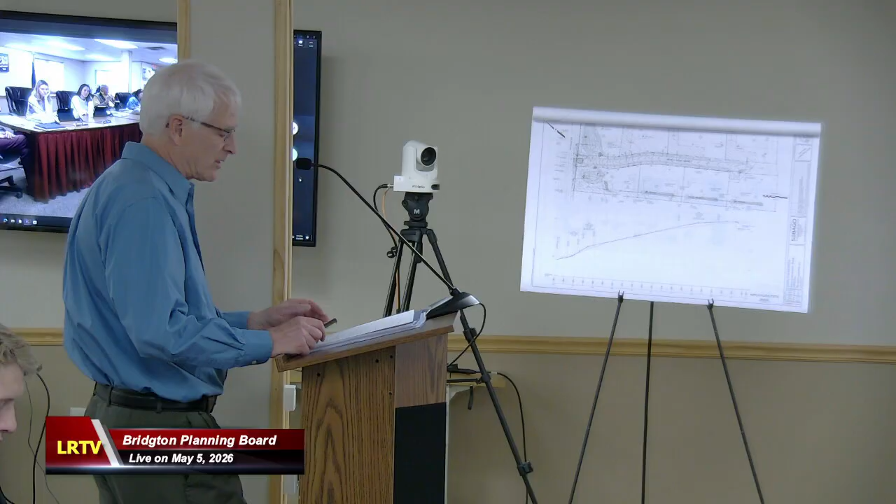It was noted at the last meeting that the well for Lot 5 is located relatively close to the stormwater basin. We confirmed, looking at the Maine State well driller, well installer, and well pump rules, that there are no specified setbacks from stormwater basins or similar stormwater features. That stormwater basin will have an impervious liner, so any runoff from the pavement that gets treated through that filter will be discharged out through the soil filter and won't have the opportunity to seep into the groundwater. So we don't anticipate any impacts there. The available or recommended areas for wells are also shown in the hydrogeologic study, which I'll touch on in more detail shortly.

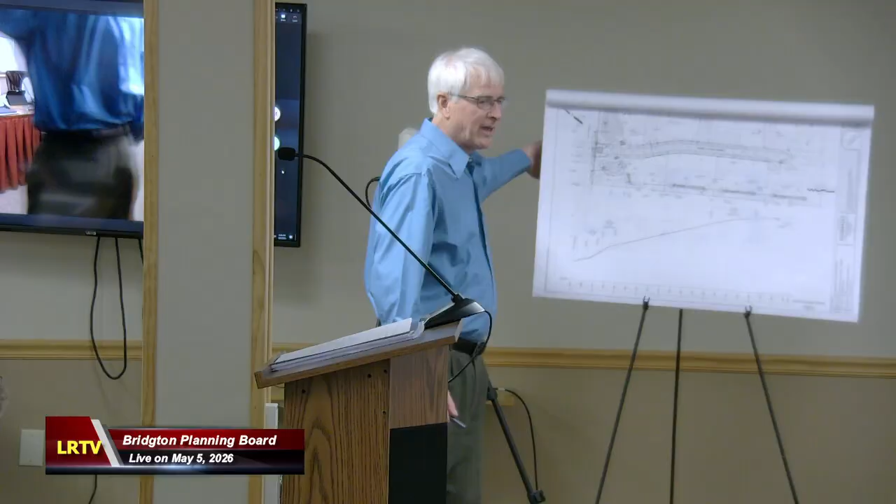We also requested a waiver on the sight distance standard, and we provided a sketch in the revised application materials. As you can see, there's a pretty sharp corner in the road here. The town standard is to provide 10 feet of sight distance for every mile per hour of speed limit. This is a 40 mile per hour posted speed limit, so that would result in 400 feet of required sight distance. The Maine DOT highway standards for a non-mobility highway would only require 360 feet of sight distance for a posted speed limit of 40 miles per hour.

Normally that 40 foot difference wouldn't matter much, but as we saw on the site walk, when you look up at this corner, 400 feet takes you right up to about this location. To achieve that, we'd have to do clearing through here, basically opening up that nice big stone wall. If we can reduce that to 360 feet, it would pull the line back nearer to the property corner, allowing us to just clear within the road right-of-way, without having to go over or up to the stone wall.

Basically we'd pull that line back and keep this buffer intact. We feel that for this type of road, given that a large majority of traffic will come out and turn right to get back to Roosevelt Trail - and looking left you've got plenty of sight distance - and given that Maine DOT standards for a highway potentially busier than Ohio Ridge Road would require 360 feet, we feel that's an acceptable level of safety, and it reduces the amount of clearing needed along that road right-of-way.

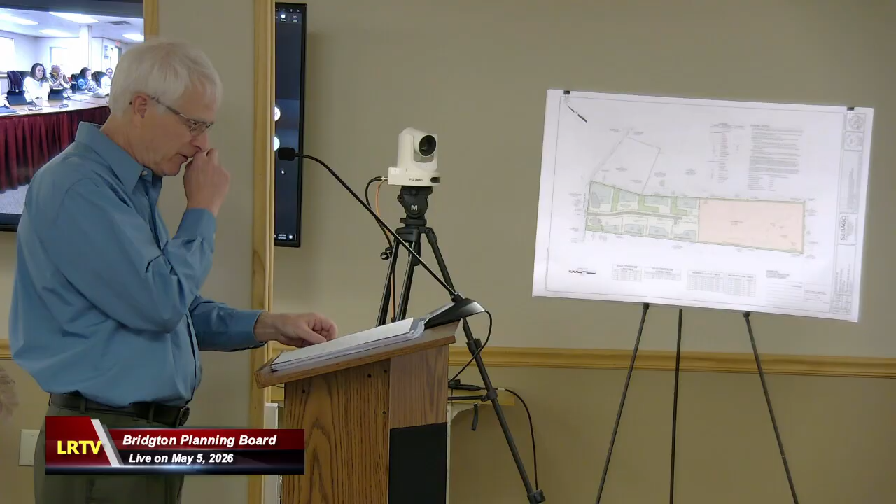There was also a comment or question about the financial capacity letter, and I'm sure Ryan can answer any specific questions, but I'll reiterate that the lender is a private lender, not a bank. However, the financial backer for this project has worked with this applicant on other similar projects. They have an ongoing relationship and they do have the funds to back this project. If you need additional information, Ryan can speak to that or provide information from his bank to support it. Based on what we've provided, given the past relationship with this lender, we feel we've met that standard - but we'll leave that up to you to decide.

We also wanted to address a comment that there's an abutting parcel that's either in the process of, or has registered, their land as farmland, and we understand that requires drinking water supplies to remain 50 feet from that boundary line. Let me flip the page.

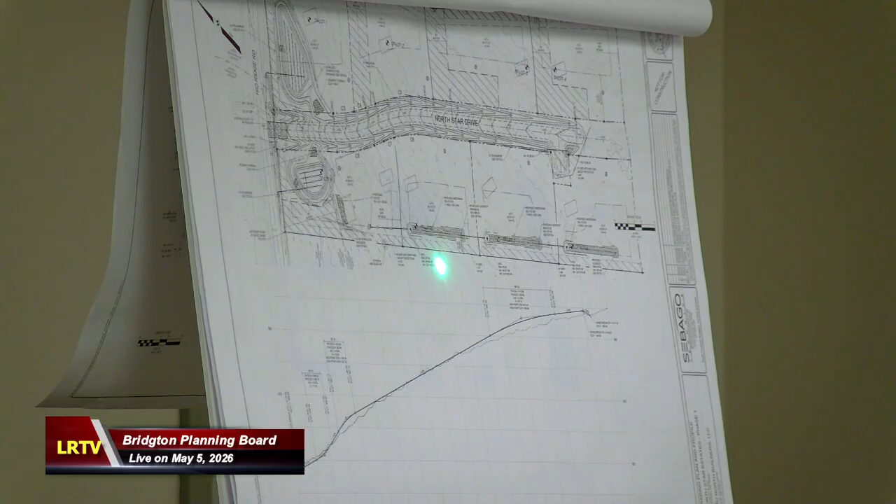The roadway itself will also pick up a lot of that runoff and carry it down to these basins before discharging into that ditch down here. So a little less of that will come off the property and down through the property than it does now. Even with the additional development, it shouldn't make anything worse with regards to runoff, phosphorus, and nitrates. It may even improve things a little bit.

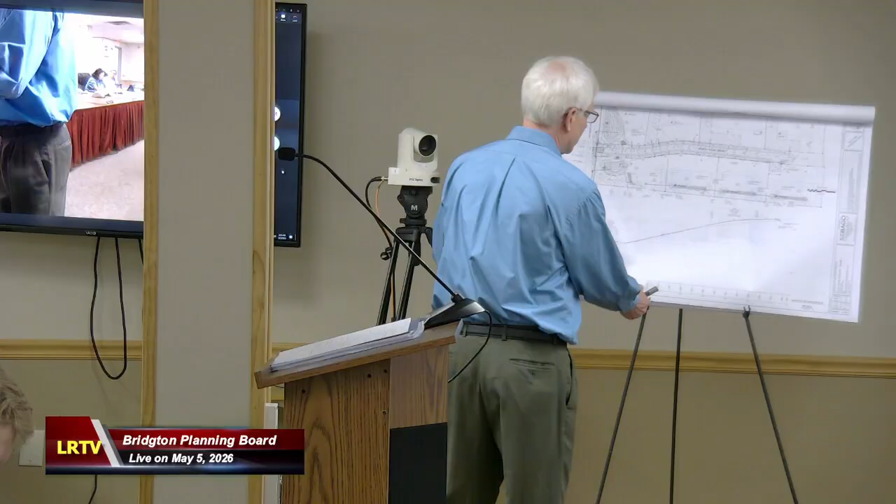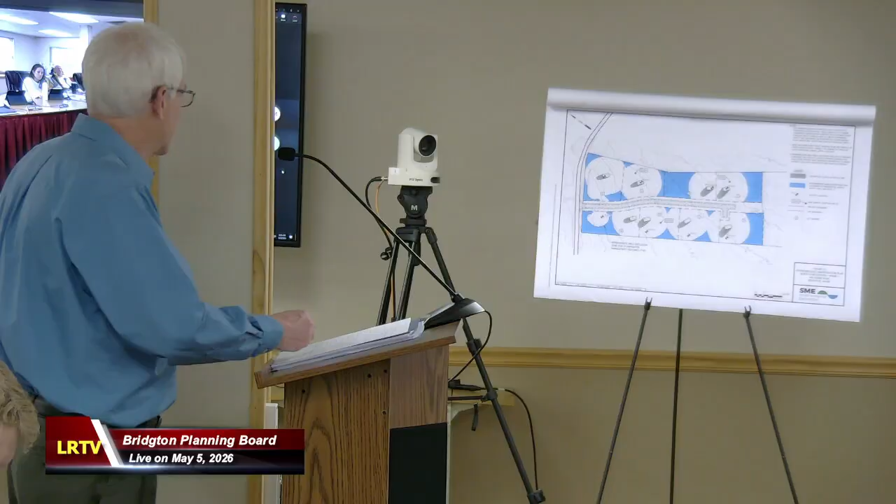I'll also jump to another sheet here that shows the results of the hydrogeologic assessment. As you can see, the nitrate plumes are plotted off here. They don't go anywhere near the boundaries, so they won't impact abutting properties. These blue shaded areas identify the areas that meet the setbacks from the wastewater disposal systems to the wells, and all of our proposed wells are within those blue areas.

The initial test pits done for these three lots were done down near the boundary. Those wastewater disposal systems are proposed up in this area. Also, this test pit done for this lot is not in the proposed wastewater disposal area. So the site evaluator who did the initial test pits is working on that this week. He's supposed to have those additional test pits done. We're also looking at doing another test pit for this one, potentially moving it up a bit to create a little bigger building envelope for this lot, where it's somewhat encumbered by the pond.

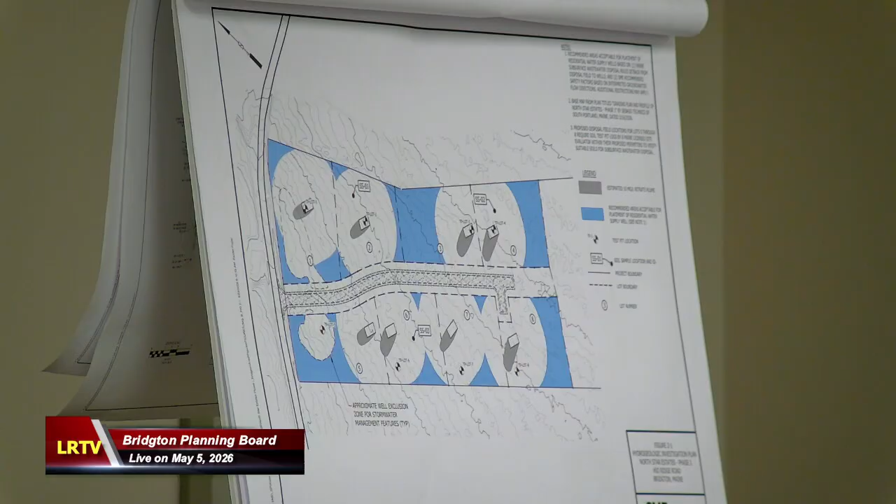These test pits are all going up gradient from the existing test pits, which already passed, and the soils and groundwater conditions tend to get better as you go up gradient on the site. We do anticipate those test pits to pass as well, but we'll have those results for you, and we'll include that in the final submission for next month.

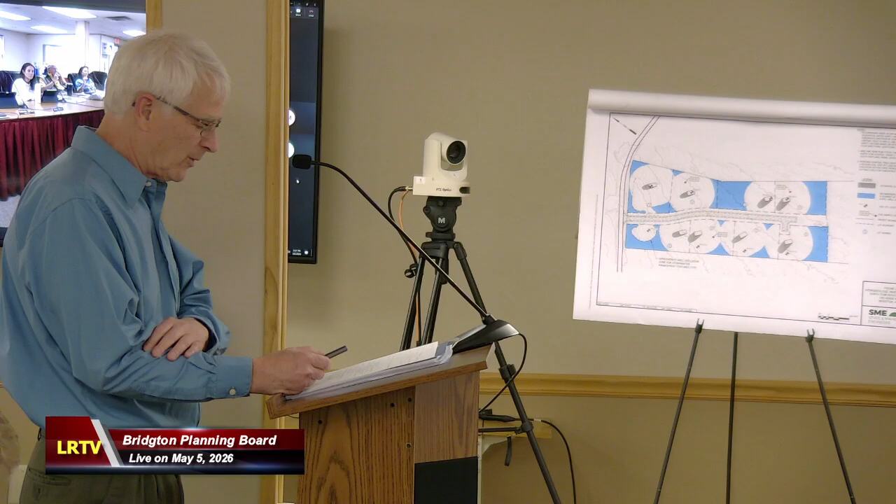Just a couple of other questions came up. I believe the proposed project is a conventional subdivision; it is not proposed as a planned unit development. We have added contours to the subdivision plan per the ordinance, and we've confirmed with Chief Garland that the hydrant specified—I believe the wrong road may have been included in the sketch plan—but that particular hydrant is within 1.5 miles of the site.

And then I guess with that, I'll turn things back over, or answer any questions you may have.

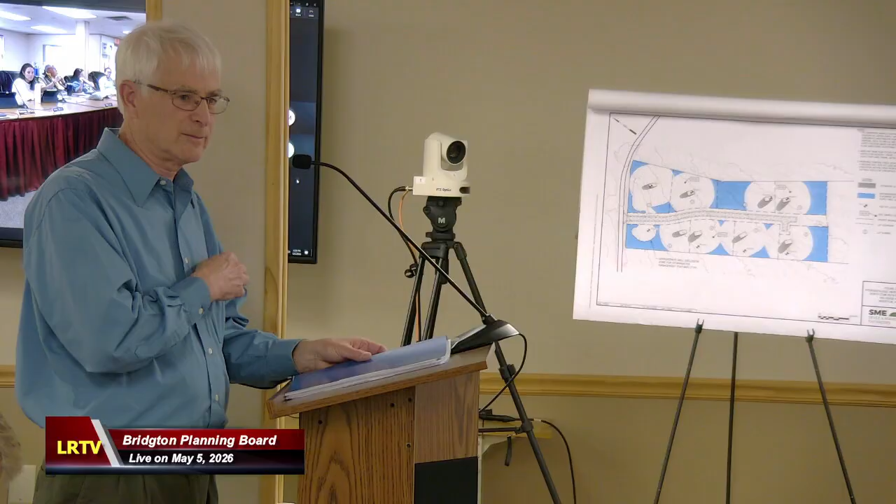Okay, I think we'll go to the public. Is there anybody from the public that would like to speak to this application? Go ahead, your name and address please.

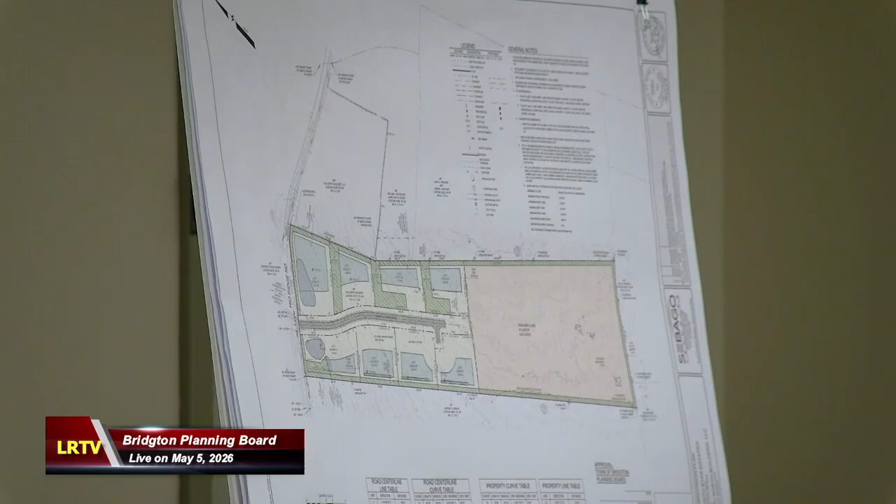I'm Braun Whitney, 186 Howard Ridge Road. So I would be the western lot to this. The way you're looking at it, I would be the almost 2,000 feet along the bottom half of this picture—that's what my lot is. I'm also the farmland; it is deeded and recorded at the state.

That was more of a protection for us in case this goes through and they put in a homeowners association, and sixteen of them decide they don't like living in the rural area with chickens and farm sounds and try to change that. The farmland designation protects us from them coming at us for that.

One of my big concerns with this project is I've been there for 10 years. It's a very rural road, rural setting—that's why we moved there. The size of this project alone, it's not rural. It's basically wiping out this 19-acre lot.

So going to some of the stuff in the ordinances and land use codes—this is in the residential area, so bear with me, I'm not used to doing this. The land use code states that the purpose of the rural neighborhood district is to protect the rural character and natural beauty of these areas while supporting low density residential development at no more than 1 unit per 2 acres, or cluster housing development allowing smaller lots or condominium clusters to occupy a percentage of land in order to preserve open space and environmental features.

They're saying this is obviously not a cluster development, which means the back half of this property is also going to get used. These lots at that point would be well under 2 acres apiece, which doesn't follow from what I'm seeing.

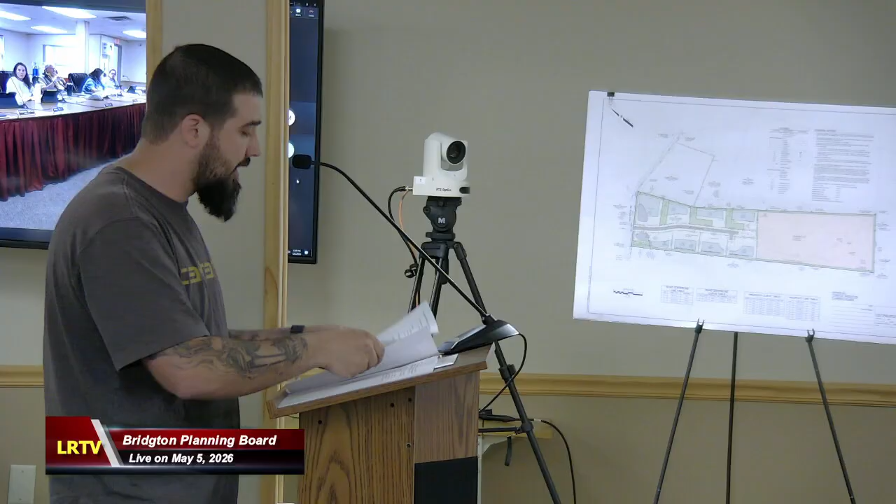The other thing that would concern me with it is the... Excuse me. DUA, just clarify for me—where is it? Oh, I'm sorry, did I word that wrong? Yeah, DUA, the dwelling units per acre.

Is this in the subdivision regs or somewhere else? This is all in the land use code for a subdivision. It's saying in the register, the rural neighborhood district, as stated, is 1 unit per 2 acres. It's saying for a rural neighborhood, it shouldn't be above 0.5 dwellings per acre. Just recognize that this falls under lot size and number of dwellings per lot.

Sorry to interrupt, just to clarify—you know this better than I do. This, because it's a subdivision, falls under the subdivision regs. And in the subdivision regs, the lot size requirements to be followed are the ones in the subdivision regs, not the ones in the district.

That's the same for frontage. However, the other dimensional standards, setbacks, those sorts of things do count. So just so you're aware. So they're not held to the 1 lot per 2 acres? No, that's part of the... isn't that right in the regs?

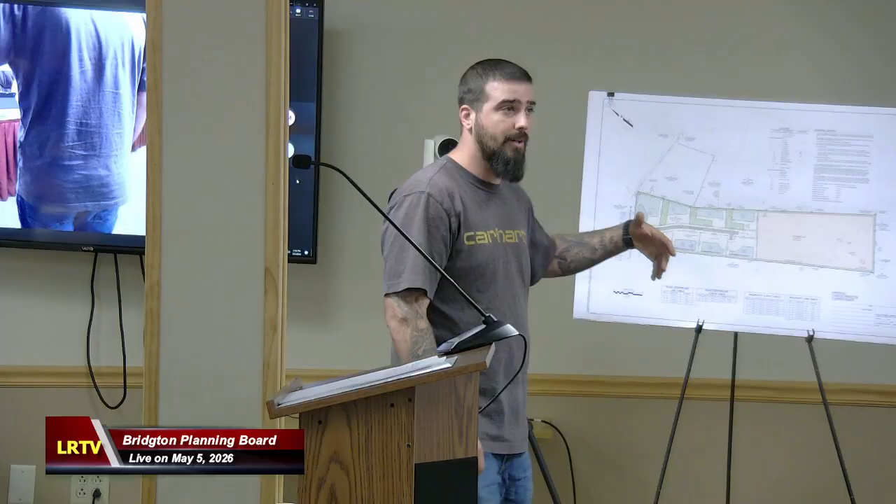Okay, so can you point on the map where that is? The spots I have pictures of would be like here—there's nothing between me and the rock wall there. There's spots, because this lot and my lot, about 15 years ago, were both logged since they were once one lot. So there's a lot of skidder trails and ruts, as you probably saw at the site walk, that go through both pieces of property.

And none of those are grown in—it's all just thin little alders, so there's no actual coverage there. A lot of those are 20, 30 feet wide, so I don't know how that's an effective no-cut.

That would be a concern for me. So, I don't feel like I should have to keep a 50-foot buffer on my half just to compensate, you know what I mean?

Okay, let me ask a question of the applicant, Mr. Garish. When we did the site walk, we were close to one boundary—was it the boundary on the top there? Yeah, you walked the upper part of it. We walked down the road.

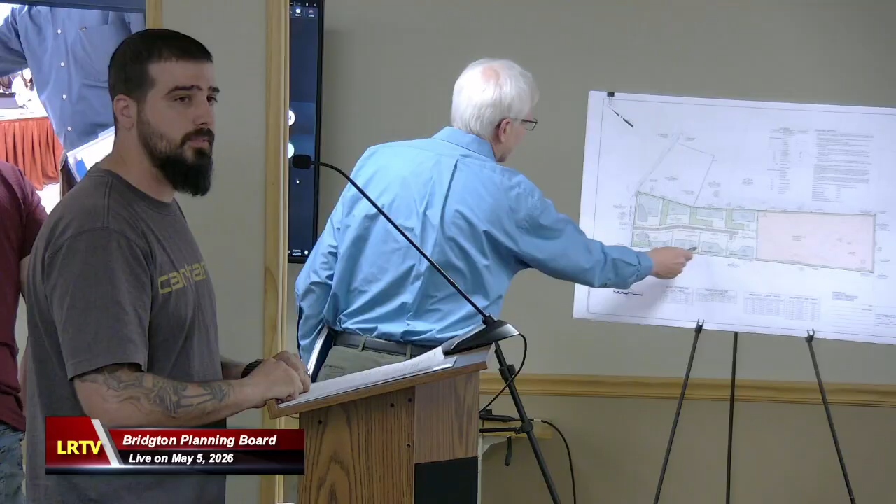When we came up, we did go up kind of in this area, then came back down, so we didn't get to see this border. It does look pretty consistent with the area. So basically where you guys came in on the site walk, that opening with the skidder trails—that's what it looks like periodically through that entire side on mine, because they logged from there to me, not from there up through, if that makes sense.

So, no landscaping plan or any real definite effective screening there would be a concern for me. I would submit those photos, and if the board feels we need another site walk to walk the border of Mr. Whitney's property, we can always do that.

Please submit those, and Mr. Garish, if you'd like to submit photos, you may also do that, and the board can look at those and make a determination. There are spots where it's dense and you can't see, but there are a lot of spots along that border that, like I said, are a concern. Thank you for that.

What was the other part of it? The comprehensive plan—I guess that's usually taken into consideration for these things too, as long as the project aligns with the comprehensive plan.

So the last one that was done, the 2025 comprehensive plan, is that what I'm referring to—is that the only one I've seen online? Well, I'm glad you've read it, but that's the one you'll vote on come June. The current one is 2014.

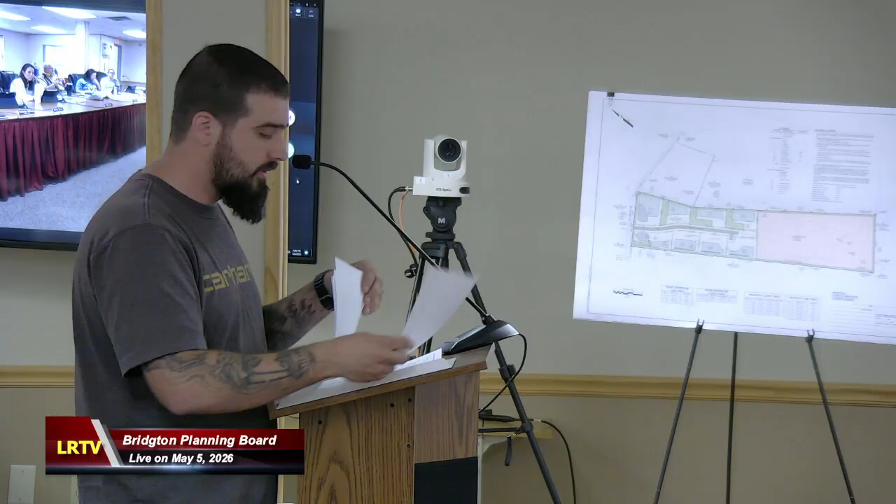So again, they're talking about the soil test being done. They said, I've owned the lot next to it for 10 years, they've had it for 10 months. That site is regularly pretty wet. The water that comes from that site comes to mine, and the water that comes from the lot to the right of me comes to me. The skidder ruts you found on there are there because the lot is wet. So I feel like if they're going to have to do the soil tests, why only do the D? Do the A that's required, because I'm worried they're going to start getting into this, realize it's a lot more wet than what they think, and it's going to end up in a giant sloppy mess.

Can I ask a clarifying question? Sure. Yeah, when you're talking about farmland enrollment, are you enrolled in open space farmland classification for property tax purposes?

No. Or did you put an agricultural easement on your property? How is it protected? The land itself is deeded as just farmland. I don't have it enrolled in any kind of tax benefits or anything like that, so it's more of a protection for me from noise complaints and that kind of stuff.

So what's the state program then that it's in, that it's deeded? Is it a deed of conservation easement, or? Here it is. I can look at it later, I was just curious what the program was.

Yeah, hold on, I can try and answer your question. Farmland registration, Department of Agriculture, Conservation and Forestry, okay. And then it has some requirements for the abutters, which Mr. Gare just spoke to. Yeah, none of the requirements are really going to affect anything that he's doing.

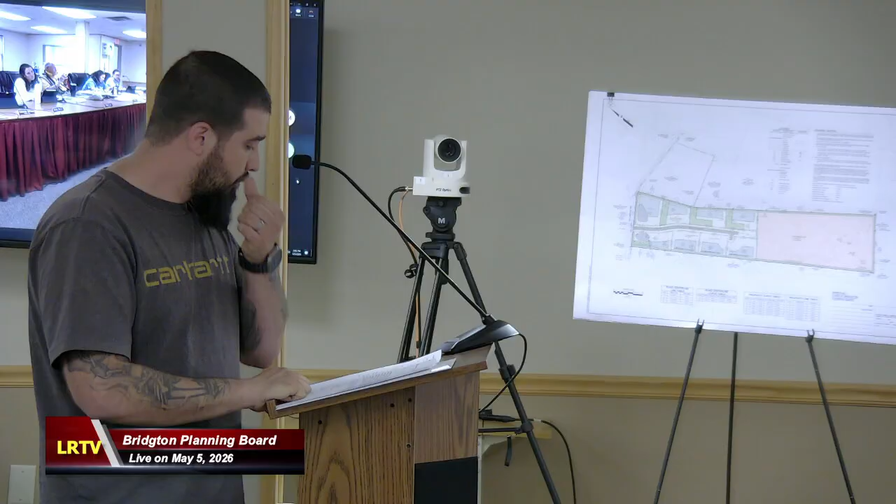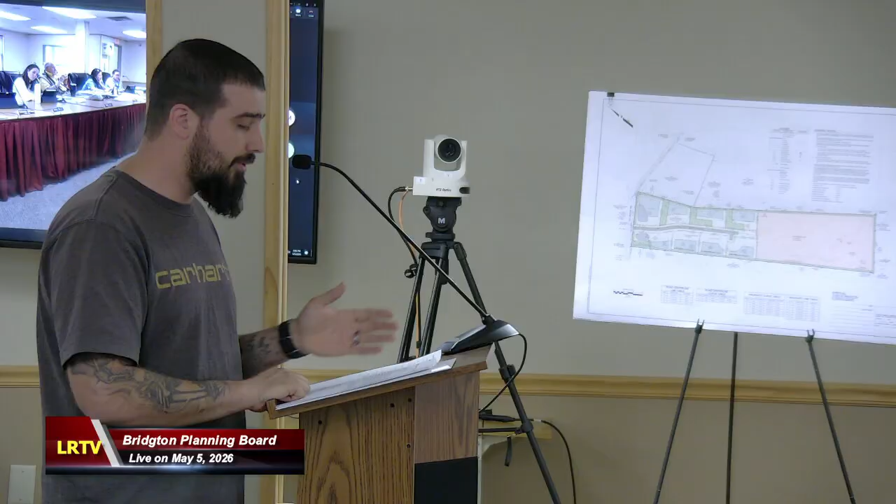Another concern is there's a lot of people that walk that road. I don't know if it's been brought up, but the Winona Summer Camp is also on that strip just down the road, which increases traffic in the summer. They also just opened up a wedding event venue a little further down the road, which they'll be running from May to October, also increasing traffic. There are a lot of people that walk on that road, dogs and just people in general, and that corner you come around to is kind of a blind corner. Usually when I come around it, you're having to slow down and dip into the oncoming lane because somebody is walking. So visibility there is pretty important.

So some things to keep in mind. Is that it? Yes. Okay, thank you very, very much.

Bill, I don't know how you want to do this, if you want to address Mr. Whitney's questions now and do that back and forth, or if you'd like to hear if there are other abutters with questions and answer them all at once. I'd be happy to answer them all at once if there's other comments. Okay, great. Is there anybody else who would like to make a comment? Name and address, please.

Hello, I'm Beth McAvoy, and I live on 45 Frost Farm Road. I went on the site walk. I was really surprised to see how wet it was.

In my opinion, that whole area of Ohio Ridge and Frost Farm Road where I live, which also has a tributary called Carissa Road, is all kind of a bowl. There are ridges in there, but it's a bowl, and that is one of the lowest parts of that whole bowl. Ohio Ridge is posted every year, repaired every summer. There are frost heaves every year right near this site. So I know that the town is going to have to do something about

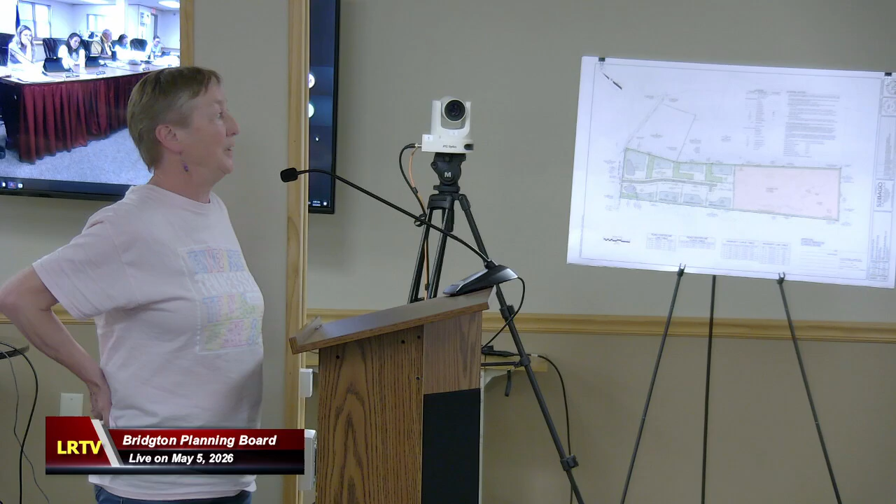In that bowl is a deer yard. There's 2 small ponds. I just feel as though we're chewing up the forest. We're chewing up the woods so that people can live on 1-acre lots with garages, sheds, driveways, wells, leaching fields. Where do we stop? I just don't think this is the right location for this. Thank you.

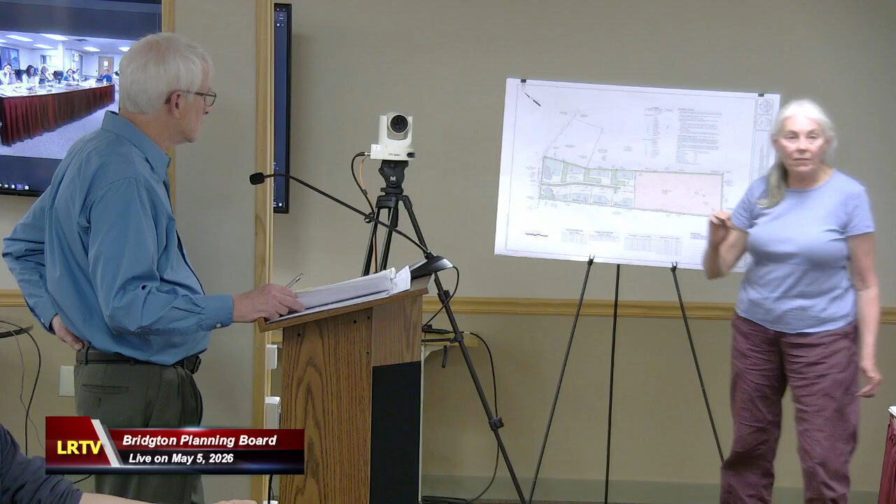Because this is the public road, if you put a 75-foot setback, that would move the setback line to about there. But these lines, which are set back 25 feet here, would move closer to the private road. Is that how you're interpreting it?

Am I getting that? What I'm saying is, these two lots, all along here, would show a 25-foot setback, I believe. This has to be a 75-foot setback. So it's got to be 3 times what this is, which means it comes into the stormwater feature.

The other question we have to answer, is that a structure or not? If it's not a structure, it doesn't matter. If it is a structure, it does matter. It has to be in a different place.

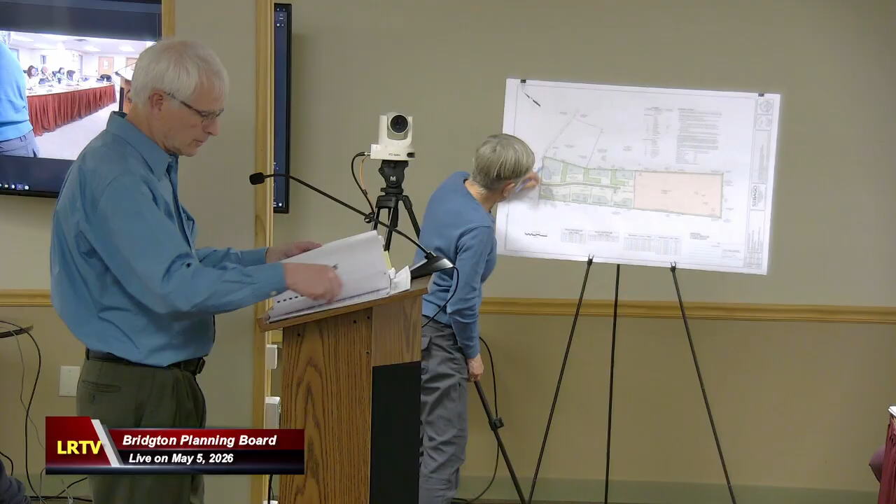So you take 75 feet here, it's going to come out to, looks like right about on the edge, right there. And you do it right here, it's also going to cut into there, okay? However, on this road, which is a private road, the setback here, I'm saying, is 25 feet because it's private. And

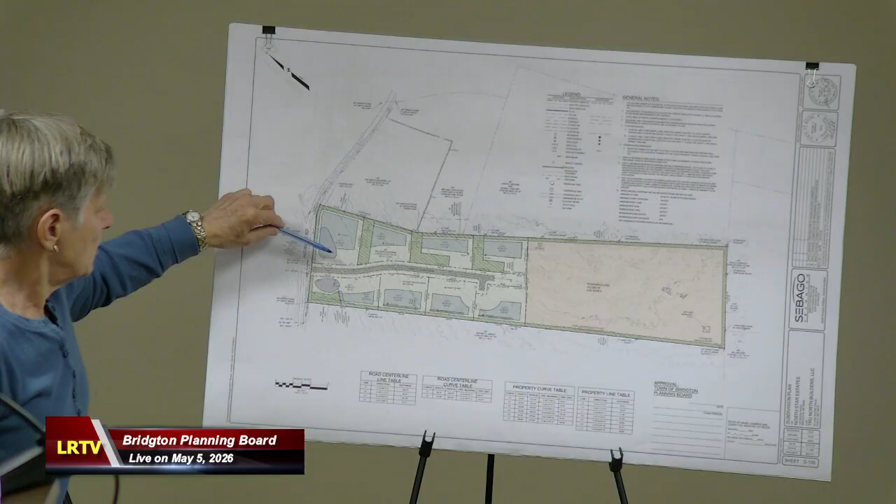because this is a common lot line according to the definition, this is a public lot line according to the definition. It has to meet the setbacks for both the common lot line and this one, but this setback is different. And in the space and bulk standards, it doesn't say to select the most restrictive. It just says you gotta meet it for each road.

So, that's my interpretation, but, yep. And just getting back to the earlier question too, I guess I'd request a little clarification. The section in the subdivision ordinance describes the minimum lot size.

Lot size shall be calculated to include only net buildable land. The minimum lot size for any residential or commercial subdivision lot is 40,000 square feet per dwelling unit. And then the definition of net buildable land is total area of the land after subtracting the land not suitable for development.

And the definition of land not suitable for development is the following areas not suitable for development: significant wetlands, streams, brooks, ponds, vernal pools, stormwater drainage features, public and private rights-of-ways, land zoned or designated as resource protection, slopes in excess of 25%, and significant wildlife habitat as delineated by the Maine Department of Inland Fisheries and Wildlife.

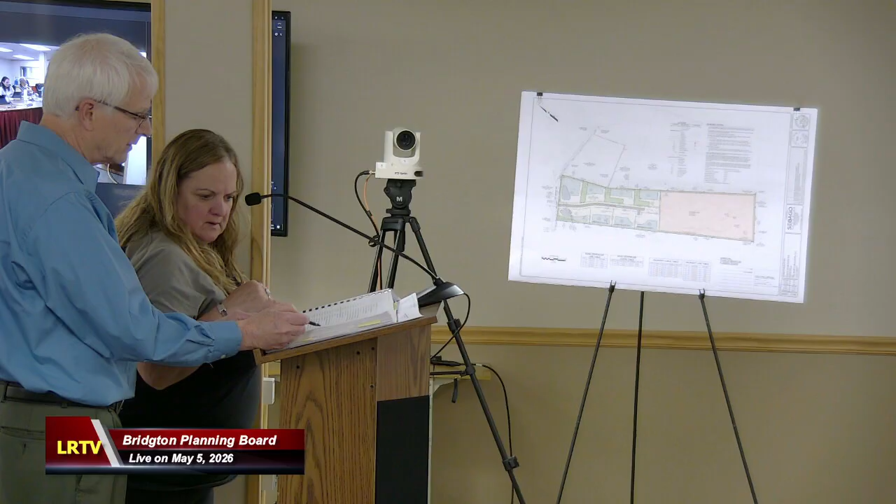Buffers, she found it. No buildings or structures may be erected in the 15-foot buffer strip. If the district setback for structures is less than the required buffer strip, the buffer strip requirement supersedes, which is not the case. Buffer strip must not be used to store trash, personal property, or vehicles, and must not be used to install septic systems or wells. So the 15-foot buffer strip, according to the buffer rules, as long as there's not a setback, as long as there's not a septic there, it's okay. I think it's fine.

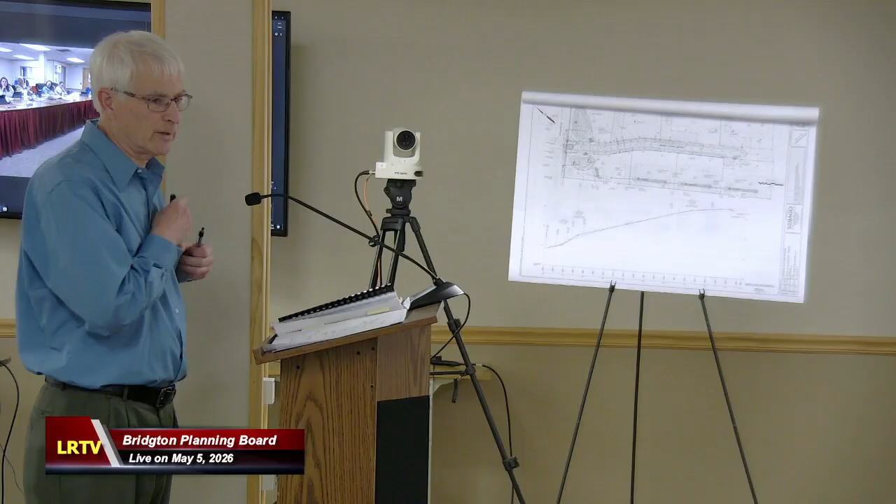According to the definition of structure, it sounds like the board is saying that the under-drained soil filter is not a structure, and the under-drained soil filters do stay outside the 15-foot area. Yeah, you kind of got two things that have to be addressed, the buffer and the setback. Sounds like you do need to adjust those setbacks, and I don't know if that'll drive any other changes.

Go ahead, Kathy, and speak loudly into this thing. I'll do my best. In section 6-4, application submission requirements for the preliminary, under B, part 2, it does ask for the buildable area of each lot. I know you've got it marked out, but it'd be helpful to have the actual square footage of those, particularly as they're going to change.

I also would like to bring up, we've had a back and forth about well location for lots 1 and 5, and I know that you went to the well drillers, but I don't think you went to volume 3 of the Stormwater Design Manual on page 6, Best Management Practices Selection Matrix, Design Restrictions and Setbacks for Filtration Methodologies, 100-foot setback to drinking water wells.

Please review. Is that public drinking water or just any well water? It just said drinking water wells. Did it say public water? It didn't say public water, it just said drinking water. Did it have a state statute reference? No, it didn't.

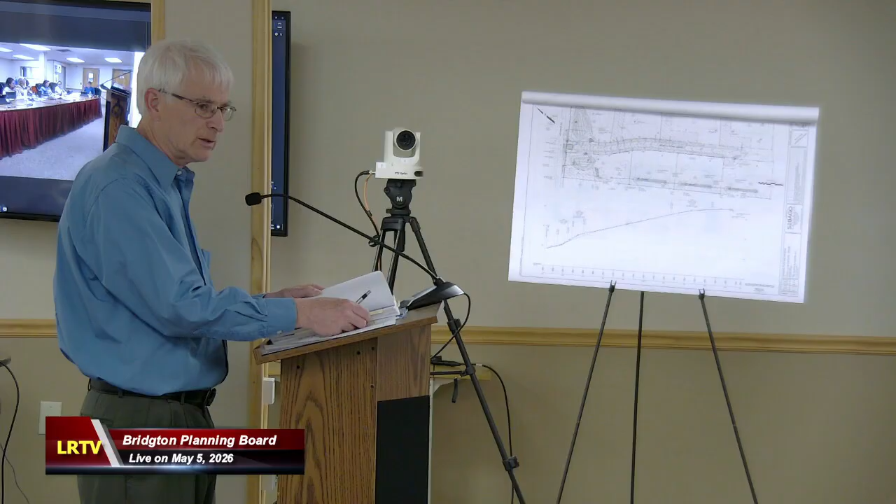Okay, where's that, Kathy? Is that part of the town's requirements, or is it state BMPs, I assume? Volume 3 of the Stormwater Design Manual? Yeah, I'm sure you used it for other aspects of this, phosphorus. Yeah, yes.

I had another question about some of the soils, because the hydrogeologic report reports that he observed Hermon soils, and yet the soils tests done prior, I'm not sure if it's done during the fall or the winter, reported Skerry and Colonel soils. And Hermon soils are different from both Skerry and Colonel soils, so if you could clarify that for us, I would be ever so grateful.

Okay, yeah, Hermon soils are different. Very stony, sandy loam. Hermon, very stony, consists of deep, well-drained to somewhat excessively drained soils that are moderately coarse and coarse textured to coarse textured.

The names are a little bit different, but that's pretty much what we were seeing out there - well-drained. But if you could clarify soils, why one set of evaluators were seeing some soils, and the other evaluator doing the hydrogeologic study was seeing different soils on the same sites, and what the implications of that potentially are.

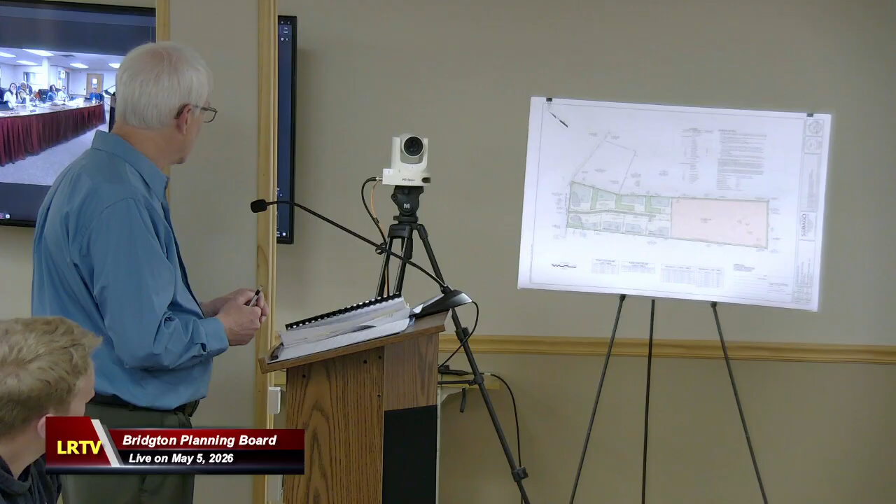There's some old stone walls shown on the map. Are any of those going to be removed? It looks like the internal drive there goes between the walls, but... yeah, your assessment is correct. There is a stone wall here, and it kind of breaks up the drainage, so we proposed the level spreader to just basically match into that wall. So it'll pull this water out into this way and into the buffer. So our intent is to leave that stone wall intact as well.

Okay. And does the board want more in financial capacity or not? No, I think we're good.

Can't remember if you said this or not, but it sounded like in the hydrogeology report they recommended doing additional test pits for lots 5 through 8. Yeah, that's correct, that's just because we moved the disposal areas. The test pits were initially done very early on in the stage, and we didn't really know how we were going to lay out the stormwater.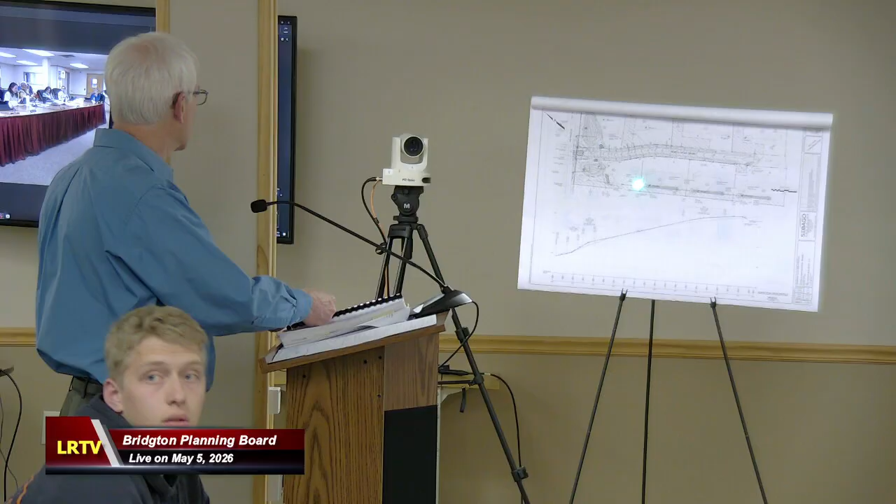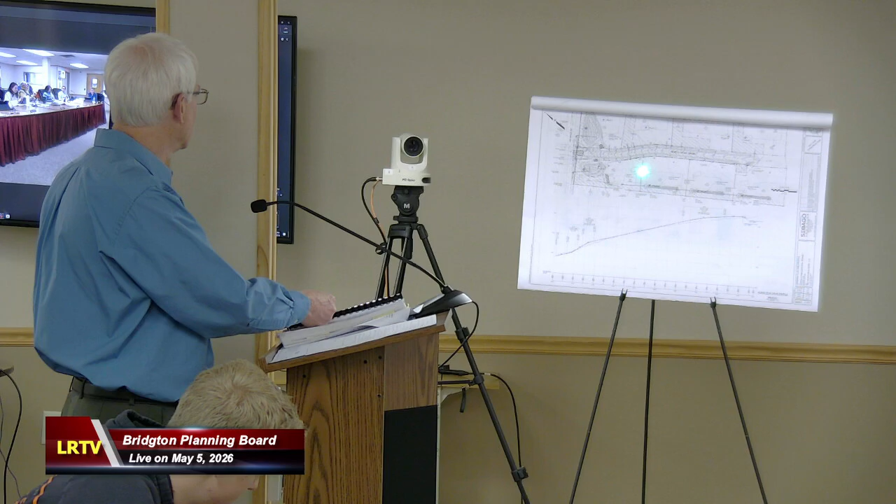So the test pit for lot 5 is up here near the pond, which we wouldn't want for the septic system there. The test pits for these three lots were down near the boundary line, and we want them upgradient further. So we were going to do new test pits just to confirm those areas are suitable. That would be submitted with the next submission - those will be done this week.

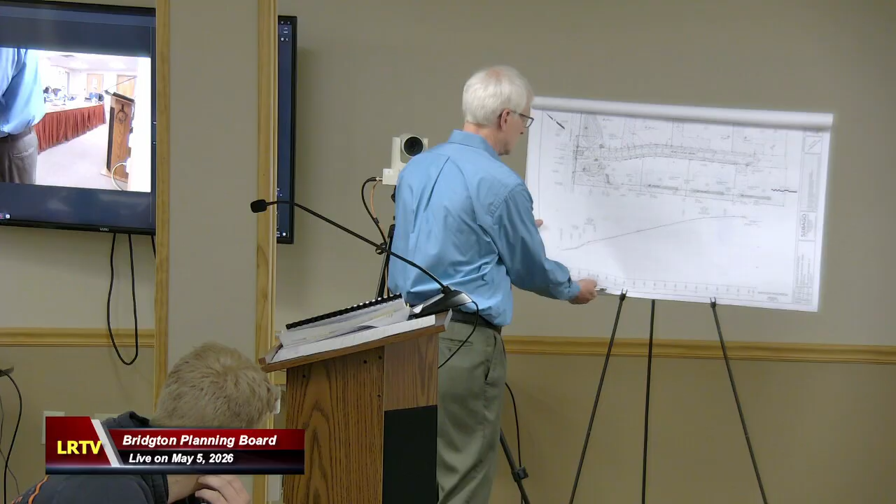The other question I had is just looking at the map and where the suitable places for wells are. I'm thinking you're not gonna put a well in the middle of a buffer because you'd have to cut a bunch of trees on the lot. It looks like it fits, but I think it's lot 3 - let me just point to it, it's easier. Yeah, this lot right here, lot 3.

And if you go back, you have a stormwater buffer there, and the other buffer's back here. So I was just looking at how big the stormwater buffer is, and it looks like you got the well just outside it, so I guess that's fine. As long as it's in the well location, I don't need to match these two up - you've got it right in here somewhere. Just saying, maybe match up the blue to where the well location is, so you know that it's not in the wrong place.

There'll be an HOA with the final for road maintenance? Yes, we can do that.

And you're gonna need a road entrance permit. I don't know if the Public Works Director had a chance to do this - if you had, Bruce, right, Mr. Warren? Yes, ma'am. If you had a chance to just look at the specs for the road and confirm it's built to town standards? I have not seen it, this is the first I've seen it.

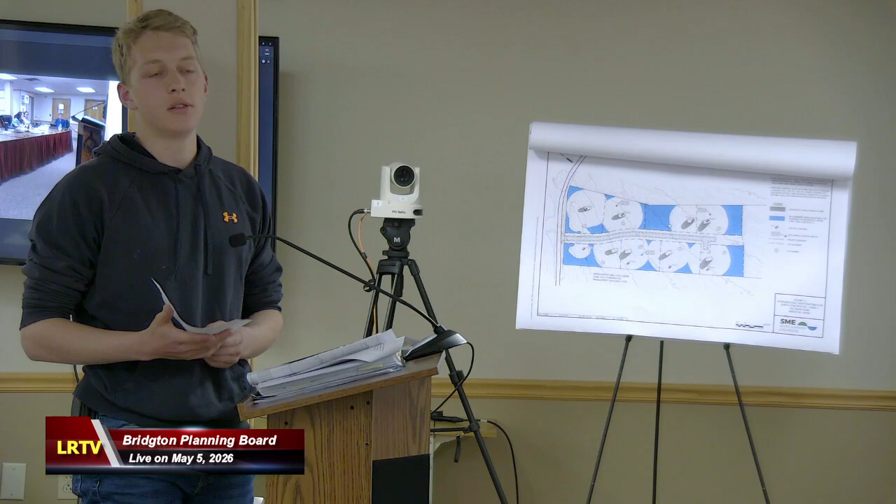Yeah, well, I'll have to argue with that one. The public process requires that we address all the public concerns.

It's the board's job to make sure the standards are met, and sometimes we do get detailed, but I hear what you're saying. Maybe your point is we're best to deliberate another time, but I want to know if there are any major issues, so this fellow doesn't end up waiting another month when he comes back. Why don't you poll the board?

I have no issues. Kathy, you have a number of questions to be addressed. Right, right - as soon as I see some answers, then I'll be glad to deliberate. Okay, Jessica?

So the things I have for the final plan is - Bill, hopefully you have this noted - address the questions Kathy has concerning stormwater and some of the inconsistencies. Change the map for the 70 to reflect the 75-foot setbacks. Address whether landscaping is required in those gaps, and perhaps also provide photos. The buildable area, clarify the soil question. And a comment on the location of the wells being 100 feet from certain stormwater features - yeah, I have all of that, yep.

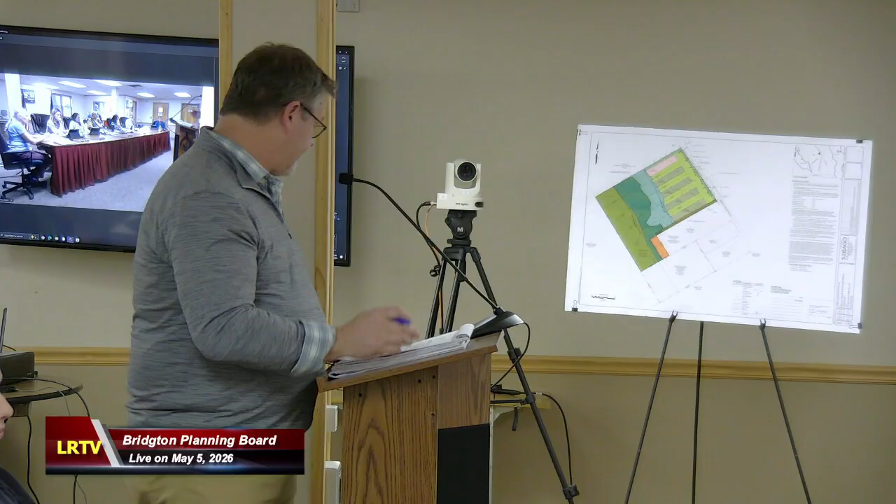The second item was designation of the shoreland zoning. There was a resource protection line and then the setback from that in the LR. We have provided that on the plan you received - this is the RP line, and this is the LR line. It's drawn on this graphic, but it's actually CAD designed on the final plan in your packet.

Hold on one second, Jim. Sorry, Jim. And we've added a note, extended on note 5, that the portion of the property located in the shoreland zone - no improvements are planned for the area of that zoning.

The third item was that the plan would be approved for single-family only with allowed ADU expansion per Bridgton land use planning regulations under Chapter 7. That note has been added as well as conditions of approval number 2.

Fourth item was to indicate by note on the plan that the access or wood road used for forestry practice, which exists over portions of Lot 3 and 4, will be allowed to revert to natural state or vegetated cover to be used for stormwater buffering purposes. That note has been added to the plan as well.

And that hasn't been - stumps haven't been pulled? Correct, that was just an old logging road - maybe when they did the road a long time ago they pulled them, but we did not, with this last forestry practice, pull any stumps.

And then the last one was to add the note for the hydrogeologist recommendations for grout casing a minimum of 15 feet into bedrock, and that is note 4 on the conditions of approval as well. So we've updated what you requested per the preliminary findings of fact, and we're here hoping we can obtain final approval so that Mr. Lopez can proceed.

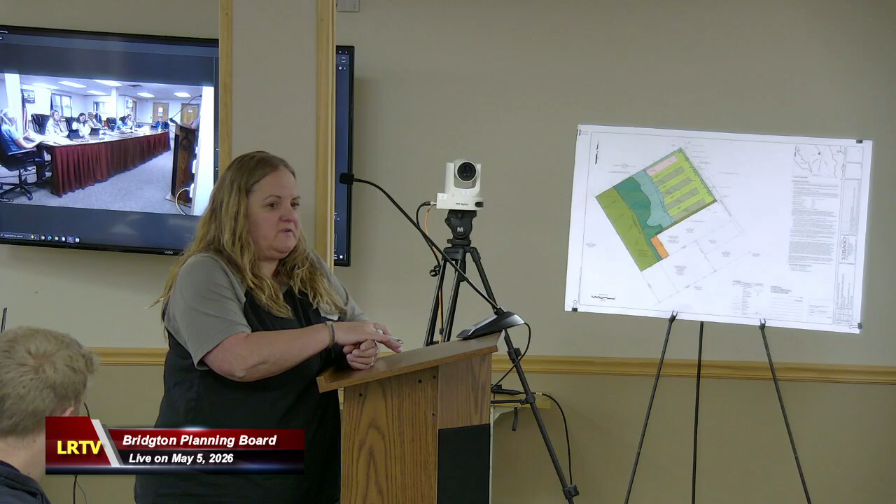Right, and do you want to speak to the MMA letter at all, since you were the one interacting with them? Yeah, I'm trying to remember everything. So basically, we asked if we needed to say anything about ADUs, but if we didn't say they couldn't have it, it would be more towards covenants. The covenants would govern if they wanted to restrict ADUs in the subdivision, and if they didn't have a restriction through that, they could come to the CEO and get permits and follow the land use ordinance.

Is that what you're looking for? Yeah, I think what you said is we can't have it on the plan, but we can have it in the findings because it wasn't proposed in the plan.

Correct. And basically, what does MMA say? Have people been able to pull it up? So read it for yourself and see what you think. I think the board agreed on that last time. We did, but Mr. Seymour wasn't here.

So I would suggest instead of having to redo all that, we just cross it out and don't initial. I think the condition as we worded it may impact that, because it just reads: the approval by the planning board is to allow single-family residence the opportunity to add future accessory dwelling units, ADUs, in compliance with the Town of Bridgton Land Use Code, Chapter 7, Building Regulations, Section 7.2, Review Standards, Accessory Dwelling Units. So in the future, when you change your dwelling units, this would still be in compliance.

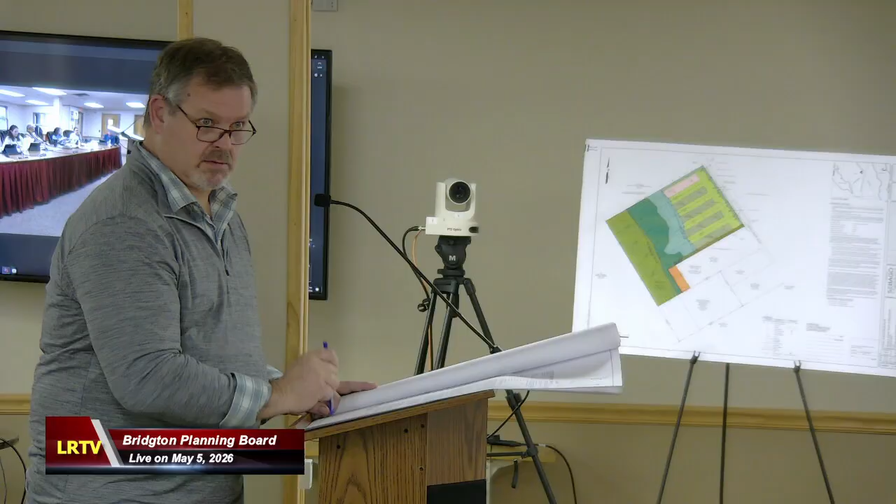Yeah, I mean, I'm going by what MMA is saying here, today and future. I don't think it prevents you from coming back, but it sounds like we shouldn't have it specifically on the plan because we didn't review it that way. We didn't approve it to have ADUs. Correct. But this clearly can be done in the future.

I would just suggest, so that we don't run into issues down the line, if the board agrees, we just cross out that section and you're still able to come back and do what you want to do.

Madam Chair, I have a question. When did the board get that information? Because we're here with the plan tonight, the final plan for signature. Did it come today at 4 o'clock? We got it March 5th, 2026. It's been in the folder. Okay, was it ever given to us? I don't remember seeing that, no.

We did discuss it at the last meeting. We put the language back in the findings of fact. Right. Yeah, I don't think this language hurts, it just basically says that you're allowing him single-family residence and then the opportunity to add future accessory dwelling units that are in compliance with your code.

But we can't actually approve those, and we didn't approve that when we made the plan, and I think that's what MMA is basically saying. Say again? So we can send them that. Yeah, we don't need it, you just want that off the plan. Is that what you're telling me? Just cross out that one thing, and it's in the findings.

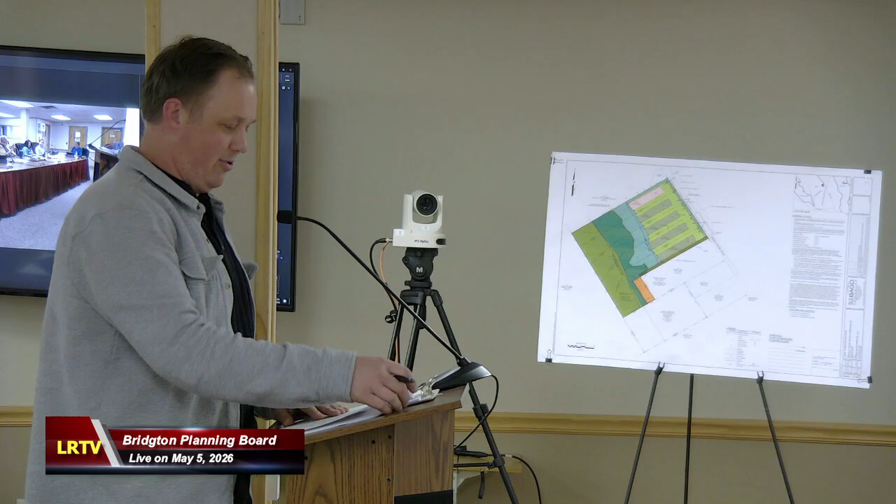Jim here from Sebago, his office is there in the back corner. He is also here to help answer any questions you might have about the stormwater management. All right, before we go too much further, I'm not doing my job tonight. Does anybody feel we need a public hearing?

Does anybody feel we need a site walk? No. We're good with that? You sure? Okay? All right, sorry, got off my game a little bit here. That's great, go ahead.

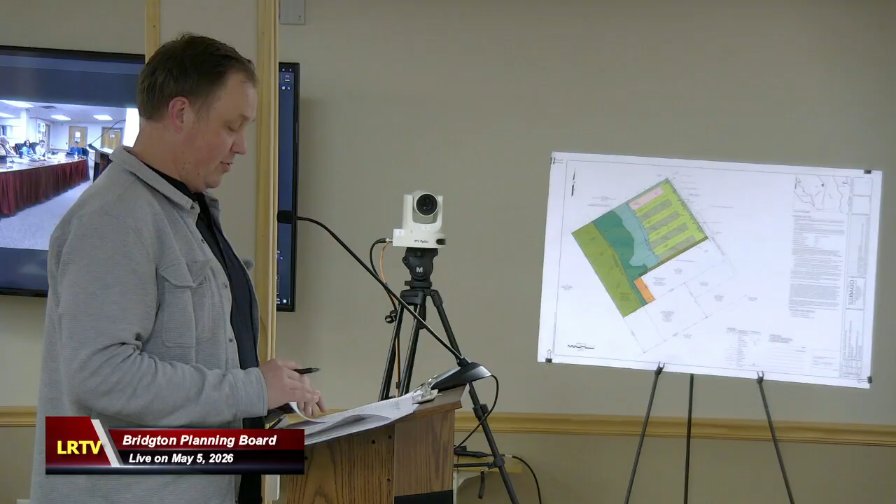So I can go into a general description of what you're seeing in the materials, but I do want to flag a couple important things up front. The most important is that what we're after is conditional approval. There's a parallel SLODA permit application in the works that Jim is leading, and we understand you'll want to see that before this is fully approved. The spirit of what we're after is getting everything else sorted with the town so that once that permit is approved by the state, we're ready to go. Okay.

We're asking to waive or get an exception to the public right-of-way and frontage setback, which you can see in the application form, due to the nature of the lot not being on a public right-of-way and its adjacency abutting the existing golf course. We'd like to not have to set back 75 feet from that edge, it just adds more paving.

You'll see on the plans an approximate footprint for a future accessory building for a small restroom and some vending where you could go get golf balls and things like that. That's really preliminary at this point. We feel confident about the size and use, but want to come back in the future with the appropriate permit application materials for the building and its connection to wastewater management. So that's not included here—this is pretty much purely a landscape-based application.

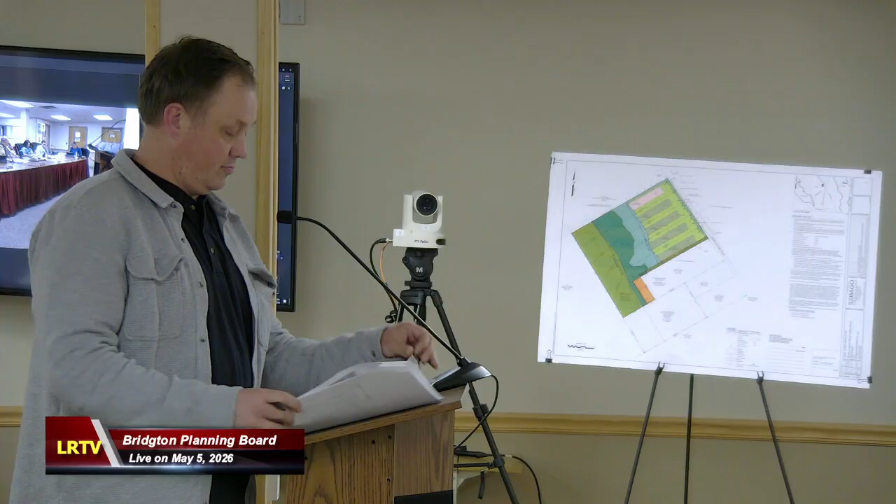Not that it really matters here, but they are asking that we accept their definition of where the front is. Sorry, I just realized I didn't bring these up. I think if you look at the definition, there's no public lot line on this lot.

There's nothing that says there has to be a public lot line. They're all common lot lines, I think. Maybe Ms. Day can comment on this. And therefore you can kind of decide which one is your front.